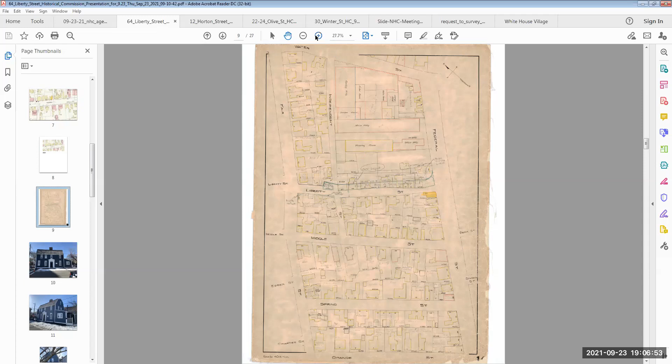One thing I'd like to point out - if you could go to the slide right above the first photo, Caitlin. It's very small on our screens, I'm not sure what's coming through on your screen - is it possible to blow up a little bit? She can zoom in on a portion if you want.

What's important is the main historic structure has existed at least since the mid 1700s. There was a later addition on the back, adjacent to Liberty Street, which shows up on the Sanborn maps back to 1888. Sometime between 1988 and 1995, a porch was later enclosed with an addition according to building permits, on the inside of that addition adjacent to the abutting property on Federal Street - part of the current shedded roof addition on the rear.

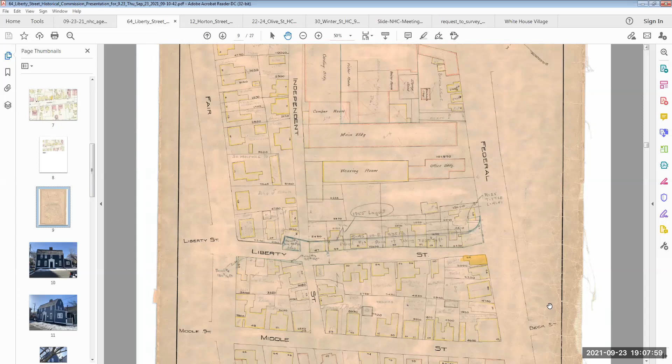On the other side, which I'll show you in a minute, there was a later added addition which the neighbors directly on the rear have said was originally a covered porch. There's evidence in the building permit files that in 1995 a permit was issued to enclose that or put on an addition - so there was a more recently added addition on the inside of this addition on the right-hand side of the structure.

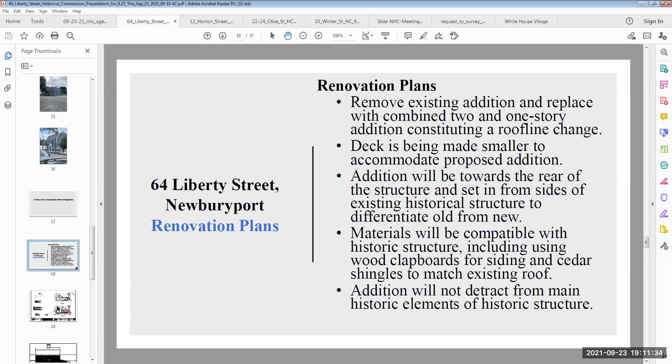You can see the proposed new addition is slightly larger, going out to the west a bit in footprint from the existing addition. Both step back from the original structure. Importantly, the original structure actually goes over the property line to the south toward the Tushes, so we are respecting the property line, which brings it inside the existing historic structure.

Similarly, along Liberty Street, it will be stepped in slightly from the existing structure. We did have a question earlier in the week from the staff — there's a tree shown in the middle of the deck. That will remain; the deck will be built around the tree.

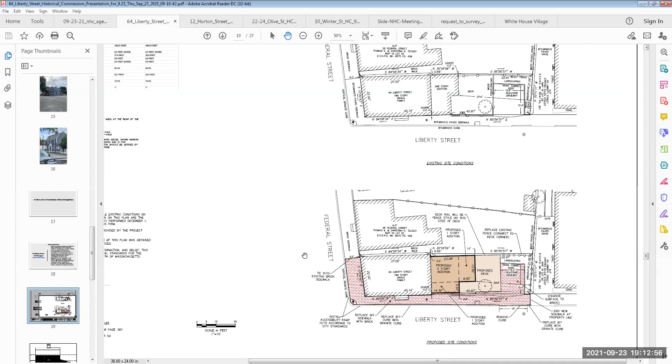So at this time, I'd like to turn it over to Julie to talk about the existing elevations and the proposed elevations.

Hi, this is Julie McDonald from Olson Lewis Architects, representing Eve Lee, our client. We wanted to go through the slides, starting with the existing conditions. So we're looking at the north, Liberty Street.

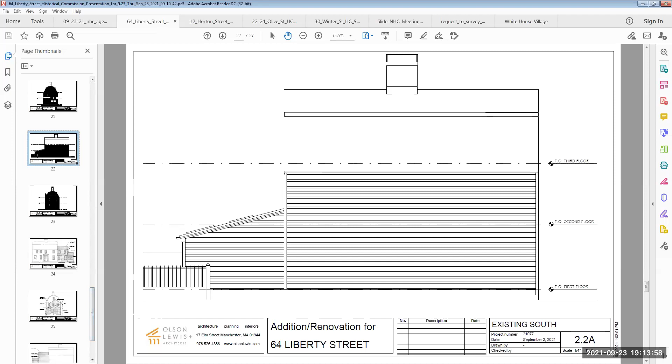This is facing the back, the south, very close to the property line. As Attorney Mead said, on the far left side we are actually over the property line at that rear corner. You could move forward to the next slide.

Excuse me, this is Joe Morgan. I have a comment or question. The reference to the direction of the elevation — this is a different standard than I'm used to. You're saying this is looking toward the east, but I would call that a western elevation. Is that not true, or maybe I'm just disoriented?

This is Mr. Morgan — this is the east side of the structure, it faces Federal Street, the east side. So Joe, if you went up to this particular side and turned around to face away from the building, you'd be looking eastward. Okay, I'm sorry, I guess I'm just disoriented.

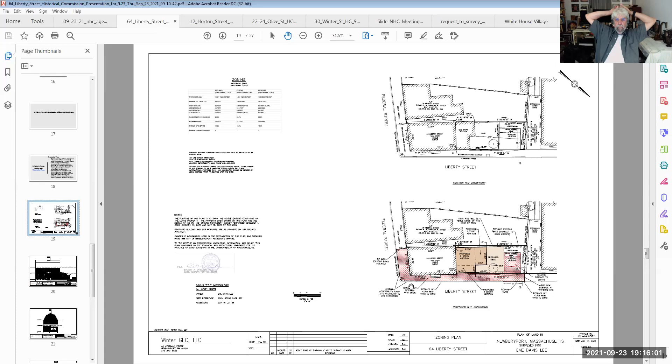Is this on the northern side of Liberty Street? No, the southern side. If we could, just to orient — sorry, go ahead. Let's go to the site plan. This is the corner of Liberty and Federal. If you were standing at the bottom of this plan looking at the structure, your back would be to the tannery. Okay, so I'm looking at the north arrow up there in the upper right — so north is down on this sheet, right? Yes, that's correct. Okay, sorry about that, Joe. Thank you.

If you could go back to that elevation and let Julie pick up on the Federal Street elevation, please, Caitlin. Thank you — that's slide 23.

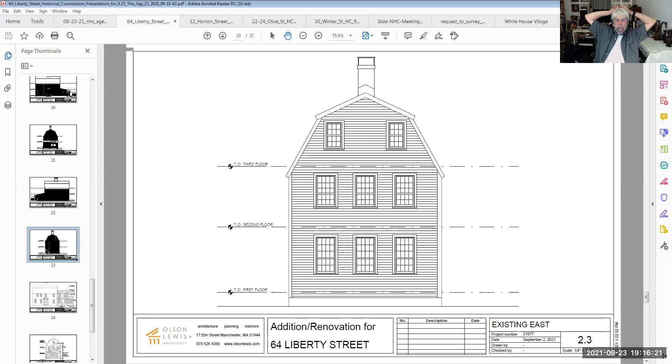And it is confusing because it's not straight east — it's not due east. Nothing is, in this town. Yeah, but it feels like it.

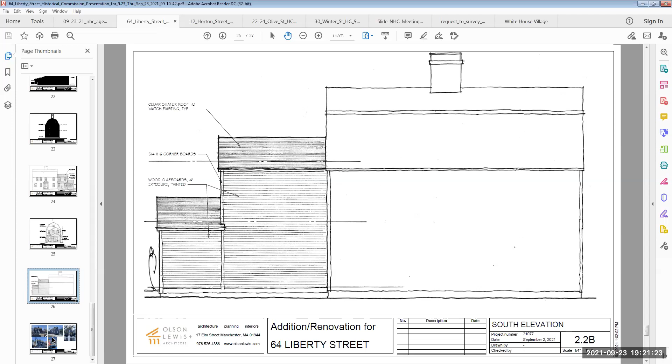And then I think the final slide is just more images, which Attorney Mead has already covered.

Yeah, and then one other thing—we did provide the board, the commission, with letters of support from the Tushes, who are the most immediate adjacent abutters on Federal Street, and the Stouts on 60 Liberty Street, which is the other adjacent parcel on Liberty Street, supporting the project.

So with that, we'd be open to questions from the commission.

Thank you, Attorney Mead. So what will happen next is before we go to public comment, which we'll do in a moment, I'll just check in with the other commissioners to see if someone has something they'd like to clarify or a question about what has been presented so far. I see a hand by Patricia Pecknick.

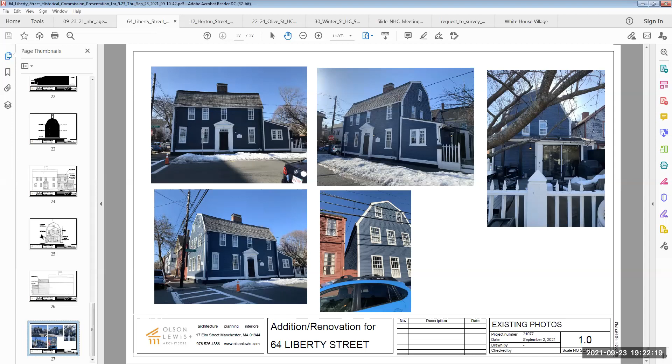Hi, I'm just wondering, what is the ridge height of the existing addition now, and what is the ridge height of the two-story part of the proposed addition?

So we have that on one of the plans. You said the eaves will align, but I'm curious about the ridge height. Yes, so if you go to the proposed—go down one more, see if we have it on that one. The ridge height, I've got it here, Lisa. Sorry to interrupt—we see it on the west elevation.

It's noted that the ridge height of the new is approximately 22 feet 4 inches. Give me a minute, I will get it—I'm able to measure where I am. To the top of the roof of that addition, we're about 12 feet 8 inches.

What's the ridge height of the original? Of the main house? Sorry, misunderstood—it's almost 29 feet, approximately 28 feet 10 inches.

Okay, and then the existing addition that's there now, that's going to be demoed, I guess. Oh yeah, I thought that. That's what I was mentioning originally.

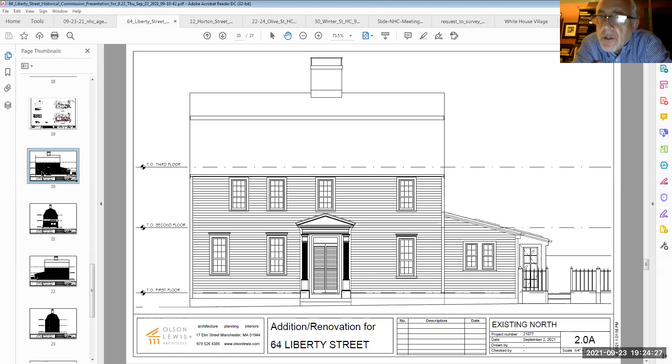Well, a couple of things - we didn't think we should necessarily exactly copy what we have at the main house. We'd certainly be open to it if that was something the commission felt strongly about. But the existing windows are fairly narrow, so we thought it was a good opportunity to deviate a little bit and get a little bit better windows for the new part.

They're, let me look to see what they are. Give me a second, I'm juggling drawings. Yeah, they're just a little over 2 foot wide. The existing, at the second floor, about 25 inches. First floor, yeah, that sounds like late... 17th century.

It should be 18th century. Yeah, again, it felt like we certainly looked at that early in the design process, and they felt small for the addition. But they certainly would be in keeping with the rest of the house.

And it may be something you want us to look at for that north Liberty Street elevation. This is Glenn speaking - would you say that even though this is a sketch rather than strictly a CAD drawing, these proportions are pretty accurate as far as the widths and all the dimensions and proportions of the existing windows and the ones in the addition?

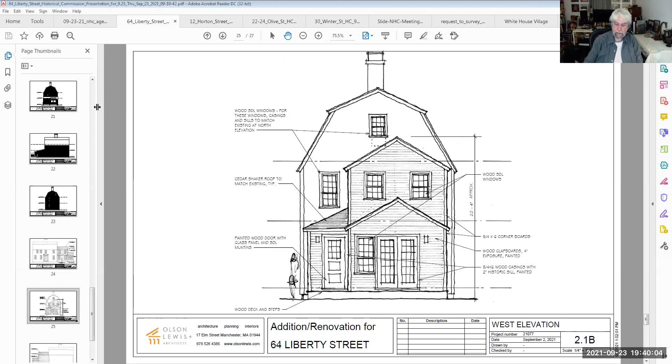Sure, Mr. Chair, this is Lisa Mead. A couple of things - I think we certainly will bring back, we will ask for a continuance, but I want to address some of the items the commission talked about. We will come back with a more specific description of the windows as requested, also the exact dimension, which is 22.4. We'll give you a line drawing instead of the sketch so there's no question about that.

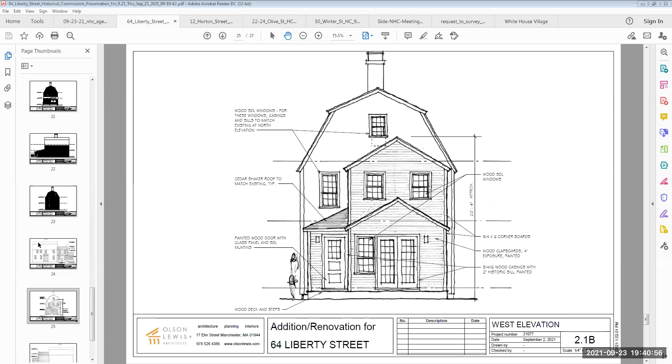I would just point out to the board, relative to the interior work - which we don't need to go down that path - it already has an addition on the first floor, so the first floor already has openings, as the commission knows. But we will be more specific about where the openings are on the second floor. As you well know, Olson Lewis Architects are a very reputable architectural firm, not unfamiliar with working on historic homes across the North Shore.

And so you should have great confidence that they will be doing the right thing there. So we can give that back to you. I guess I wonder if you would like to see the smaller windows on an elevation as compared, just to give you an idea of size. The new proposed windows are 30 inches, and as you heard, the existing are about 24. So that's the difference in sizes. But if you would like to see how that looks, we will bring that back to you as well.

Thank you, Attorney Mead. A quick question on this north elevation we're looking at right now. The second story windows look a little smaller, but is that just because they're further away, or are they actually the same size as the first floor? Can you answer that question about the size of the two separate windows, first and second floor? Yes, actually at the second floor we are a little narrower. Those are 2'4" versus the 2'6" at the first floor level.

Okay, which is a little bit of differentiation floor to floor. Yeah, that might, okay. If you're willing, that would be great, Attorney Mead, if I understand you correctly, to get the final and cleaned up drawings. And if you're willing to take that step of letting us be able to see, so we can get a consensus vote on which we think is more historically accurate or appropriate, or which better conforms to the standards.

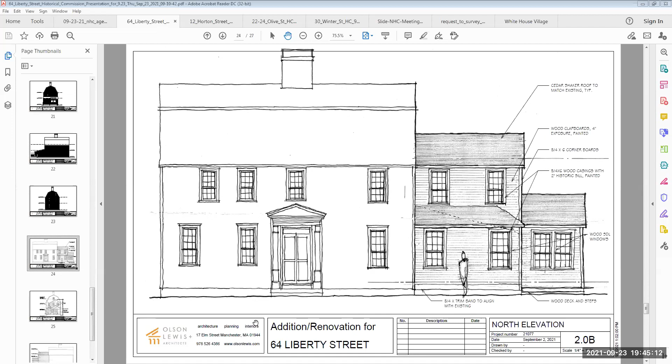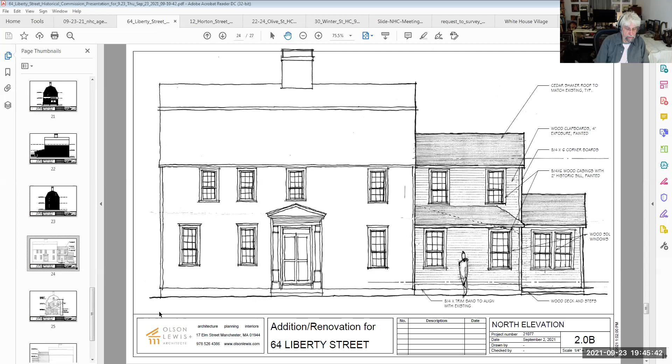Thank you for your flexibility and cooperation, Attorney Mead and applicant, if you're there. We'll see you in a couple of weeks, and hopefully we can get this resolved. I think from what I'm hearing, the chances are good, and we'll take it from there. Thank you very much. And thank you, Ms. McDonald. Appreciate your coming in. And I know Attorney Mead, I'm sure you won't be going anywhere.

I believe you'll be hearing from you on a couple other matters, such as the next one I'm moving on to, which is 12 Horton Street. This is a similar situation. We have a newer house, late 19th century, but it's listed as contributory. Doesn't have a Form B, but it is listed. And again, with this one, it's a similar situation as with the first matter.

Attorney Mead has suggested that she expects the commission will find that it's historically significant and should be preferably preserved, whether or not we agree to the formal plans. So the same question, Attorney Mead, would you be averse or adverse to us moving swiftly to the vote

on the motion as to it being historically significant and considered for preservation? I don't, Mr. Chair. Lisa Mead, Talerman and Costa, on behalf of Lisa Adams and David Miller, who are the owners of the property. I certainly don't. And the record shows all of the history. Mary Eaton was kind enough to provide some additional color around this section of the city, and my hope is that folks take a look at it, because it's certainly interesting to learn how Horton Street and the area generally was laid out. Yes, I did see some of that, and that was interesting. So thank you for providing that history.

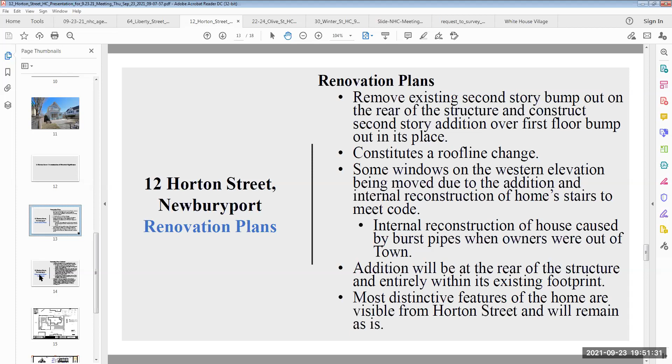Kevin will talk about that a little bit. So the easterly side is stepped back significantly away from the most easterly wall of the structure, which we'll show in a minute too. If you could go to the site plan, Caitlin, please. So here is the site plan. That's not changing at all. Everything's going to be done within these lines.

And with that, I'm going to have you go to the next slide, which will be the beginning of the elevations. Kevin? Good evening, this is Kevin Latady. Actually, the last name is pronounced Latati. Sorry, Kevin. That's all right. It's not a common name, so most people get it wrong. And that's how I know if you don't know me.

So the elevations, the existing north elevation is the Horton Street elevation. There are no changes to that. The significant elevation that you do see from Horton Street is along the existing east elevation.

What you're seeing in the pink, or the reddish tone, is the second floor bump out back bedroom. That's going to be enlarged to encompass the whole width of the back of the house. You'll see that in the updated elevations on the next slide.

There is a chimney in the lower roof area that's coming out. That was an added fireplace that I believe was done at one of the kitchen renovations.

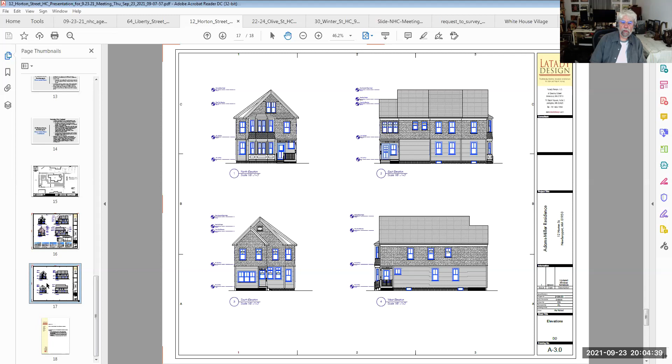Thank you. Let me just—Caitlin, could you go back one slide to 17? I just had one real quick question, I think I got this. Looking at the upper right, the east elevation, where the roof notches down there, am I correct to say that higher ridge line is all existing structure, and the part you're building out or modifying is strictly that lower roof line there?

If you go back to slide 16, it'll be a better picture for you. Okay, now I see. That's why I do that on the demo plans, because it makes it easier for us to see how that works. So you're extending that original a bit, kind of trying to make it look original by continuing the flare and all that good stuff.

It's kind of awkward the way the house has that kitchen with a lower roof there, and it doesn't extend back. It almost felt like this is what they wanted to do, but hadn't gotten around to it yet. I specialize in older and historic homes, and it really is about the storytelling - you start with one room, then they just keep going from there. It almost had that feeling like they just hadn't got to it yet.

Okay, well, let me turn to my fellow panelists here. Does anyone have, before we do the public comment period, any question or clarification on anything before we go to public comment? Looks like people are not hearing or seeing any comment.

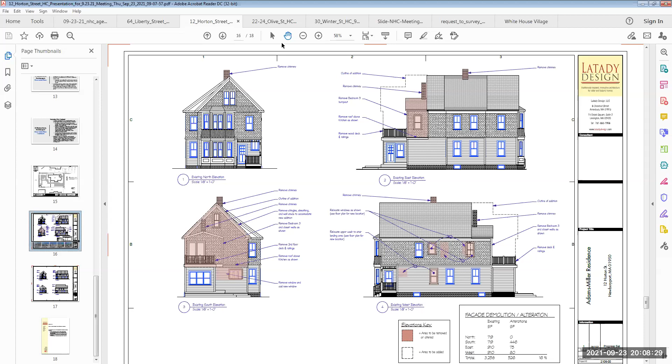Late 1890s. And is this all dimensional lumber in the existing structure? It is a balloon frame, sawn lumber. The foundation is rubble with brick laid on top, and the sill is an 8x8 beam with balloon frame above. Does that answer the question, hopefully? Yes, thank you, it was just for information.

I have no other comments. Thank you, Joe. Okay, who else? Mark Cindrone, your thoughts? Thank you, just a quick practical question.

If you're going to take that chimney down, where is your boiler chimney going to be? It's direct vent. I'm sorry, I missed that, could you repeat that? It will be direct vented, and it will probably go to the east, the west side, direct venting.

I think the flood was due to a heating system failure, so I assume that's a new heating system you're putting in. Actually, the flood was a pipe going to the second floor bathroom, and since it was the second floor, it flooded the first floor walls, ceilings, and then the basement became a swimming pool. So the boiler, everything was pretty much toasted down there. All right, our sympathies with the applicant, but anyway, moving on.

Let's see, Vice Chair Pecknick, any thoughts or comments? No, I support this. I was going to support it when I did the site visit and looked at the plans and walked around the street, but then they had me at Window Woman of New England. I'm sorry, what did they have you at?

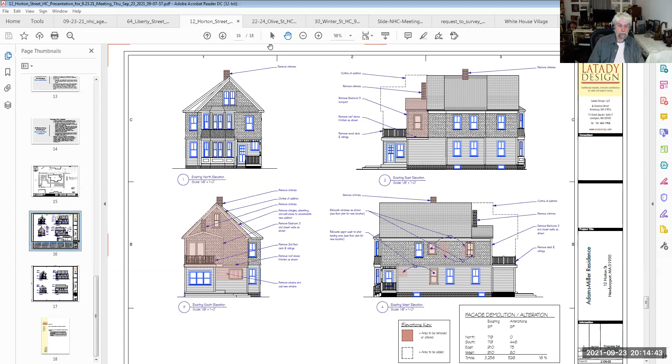So this means, if the applicant is listening, I'm sure you're smiling. The demo delay was only imposed for probably less than a minute, and we look forward to you successfully executing your plans. Thank you, Mr. Latady, for your presentation and design, and good luck with getting this done and moving back into your house. Great, thank you. Thank you very much, okay.

I believe, Ms. Mead, you're still with us, right, for Olive Street? I am. Okay, all right, so we move to the next item on the agenda. This is 22 Olive Street, and I will turn it over to you, Ms. Mead, to introduce the updates to your plan. But let me first explain, for the board and mostly for any members of the public, what we're about with this phase.

The Historical Commission has already found this structure to be historically significant and preferably preserved, as with the previous two, and a demolition delay was imposed. Now, the demolition ordinance states that this delay is enforced for one year unless, quoting here, the NHC has been satisfied that the applicant has made a bona fide, reasonable, and unsuccessful effort to locate a person willing to purchase or lease and preserve, rehabilitate, or restore the preferably preserved building or structure, or B, the applicant has agreed to accept a demolition permit upon specified conditions approved by the commission. Such conditions may include review and approval by the commission of a revised set of the submitted site plans according to the requirements of section C1F.

So this is where we are now. Attorney Mead, I believe, is going to present some revised plans that they've been working on since this was put under the demo delay, about a bit over a month ago. So with that, I'll turn it over to Attorney Mead to present the revised plans.

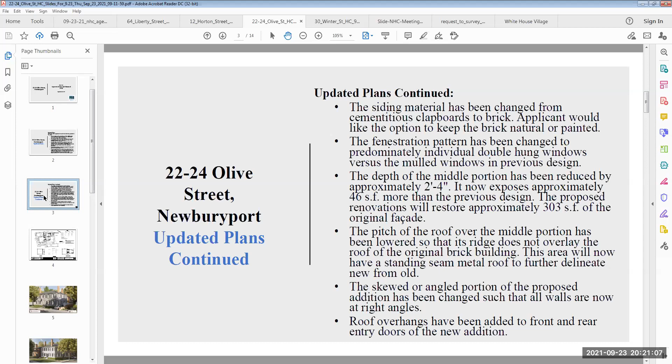So with that, what I'd like to do is go to the next slide, which is the site plan, because I think it's really important. So as I said, a couple of things: you can see by the mass of the addition, which is crosshatched, the existing addition goes all the way to almost the sides of the historic structure.

So obviously that is going to be taken off. The new addition, you will see, is actually not even as wide as the historic structure. In fact, significantly less on the rear side, the north side, right there. It's more narrow, if you will, with a step back from the side yard than the original structure.

Also, as I mentioned, given the removal of that broader addition that exists today, as well as the existing garage, the lot coverage is much less, and the open space on the lot is more than under existing conditions. And so with that, I'm going to turn it over to Ernie.

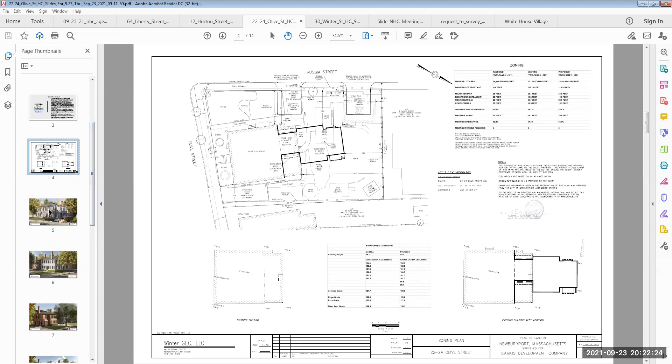Thank you, Lisa. Ernest Mayo from Tektoniks Architects. I think Lisa covered the particulars very well, so I'm going to move into the images specifically so you can see the project.

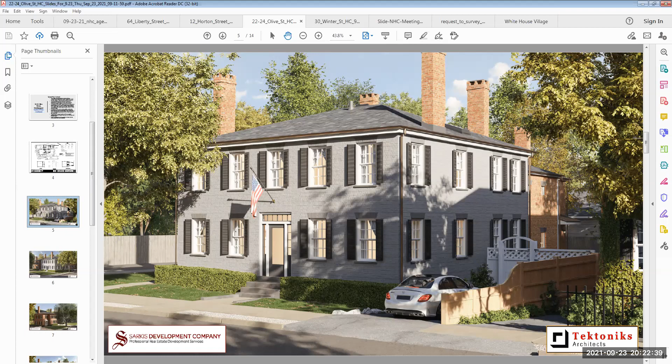This three-dimensional view is from Olive Street. You can see the original building in the foreground and the addition peeking out through the backside. The red brick portion of the building that's protruding is the addition, with an additional chimney added to tie into the existing building.

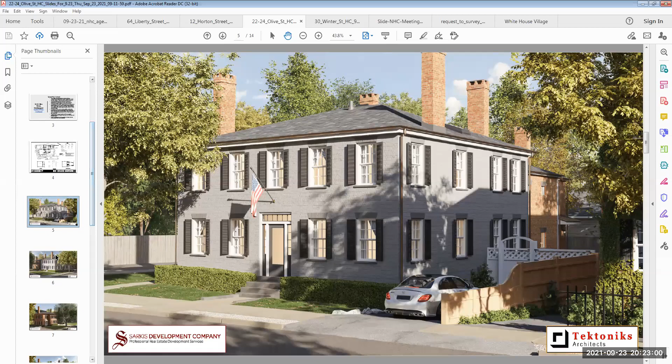This is a view from the corner of Olive and Russia Street. As Lisa mentioned, the addition has been straightened, if you will, so that the planes of the Russia Street facades are all now in keeping with the plane of the original building.

However, the main body of the addition has been set back slightly further than it was in the last presentation. We have also set the connector middle portion back even further from the addition facade than in our last iteration, so that there is a significant void between the main mass of the addition and the existing building.

We've also articulated the main mass of the addition, the far end of it, by setting it back further. These are techniques we're using to try to reduce the apparent mass of the building when viewed from the street. Each of these changes in setback is serving to make the mass not only smaller, but appear visually smaller, which was a concern in the last meeting.

This view is from Russia Street looking towards the building and towards Olive Street. Our next slide will show it with the tree removed, but we wanted to show it with the tree in place, which we're keeping.

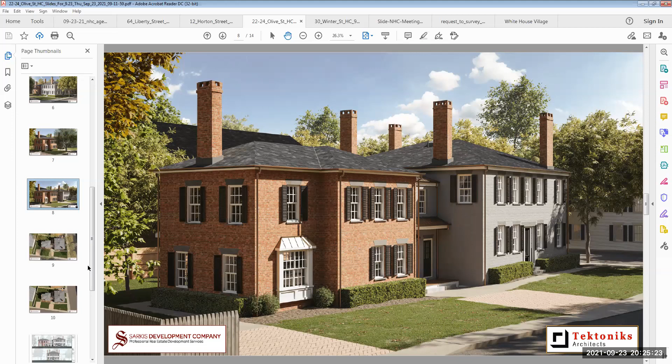The connector between the red brick portion of the building and the original building—actually the roof line dies underneath the eave of the existing roof. We no longer overlay the original historic roof, which we think accentuates and celebrates the original building even further than we had done previously.

We have added metal roofs to the roof overhangs and the connector roof, and also the bay shown here in the foreground, as a way of distinguishing the materials from the original building and also allowing us to drop the slopes of the roofs far enough so that we can tuck down lower and reduce the apparent mass further.

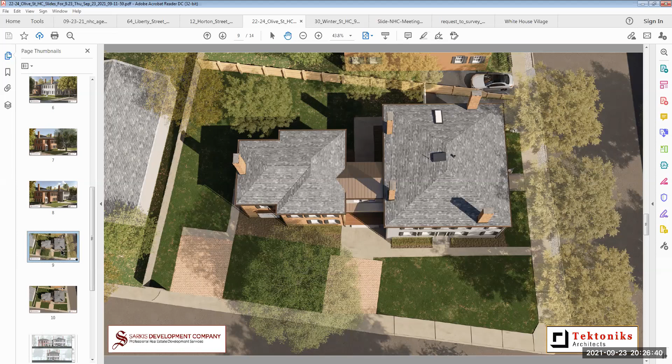The setbacks off Russia Street have been increased. The setbacks off the side and rear yards have been increased. This next slide shows the trees removed so one can get a sense for just how large the lot is and how much open space exists around all of the buildings.

In fact, when compared to neighboring sites, the addition we're proposing, virtually centered on the lot, is further away from its lot lines than a large majority of the buildings in the neighborhood. I think that's a very important point.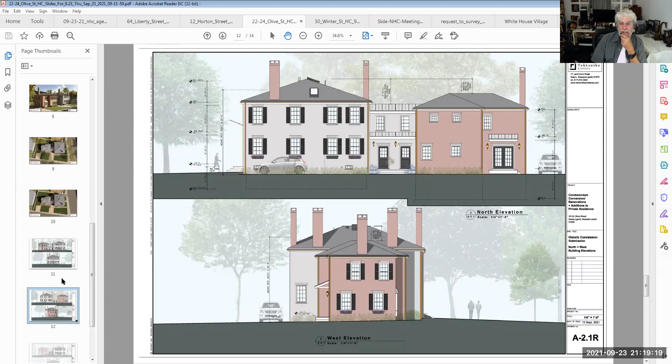It's not quite a bay window, I'm not sure how to refer to it, that white window on the Russia Street facade. You can see it on slide 11. Thank you, Caitlin. It kind of draws a lot of attention to itself, and perhaps from the architect's point of view, you wanted to add a little more interest there. But I think it's a subject of debate as to whether it's a little bit too much attention.

My feeling is not so much that it's more, it seems almost like it's a different stylistic period than the rest of the fenestration, because you've got windows on that addition that are consistent with a more or less period style. Looks like they're 6/6, which was a slightly later period, consistent with, I forget the age of this house, but certainly consistent with what appears to be a general federal period or thereabouts, turn of that century appearance. But then you've got that window that almost looks like it's from a much later period, like something in the second half of the 19th century. So that, to me, is a bit jarring.

Other than that, I think some of the concerns of the abutters, I wouldn't say they're invalid, they certainly have merit. I think some of them are the purview of the zoning board, in terms of parking constraints and so on. If Caitlin, you go to slide 10, I think you can see from that rendering there's quite a bit of open space still there, considering Newburyport lots, not only on the Olive Street neighborhood but all along that neighborhood.

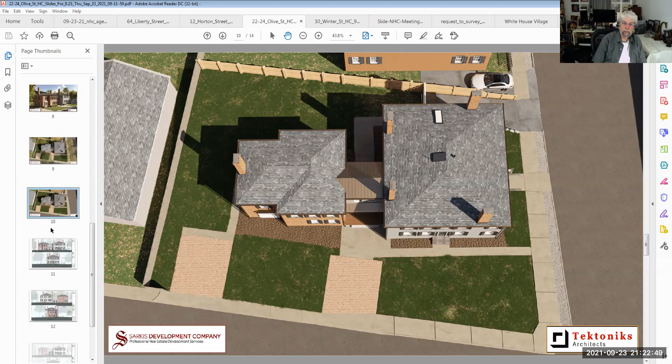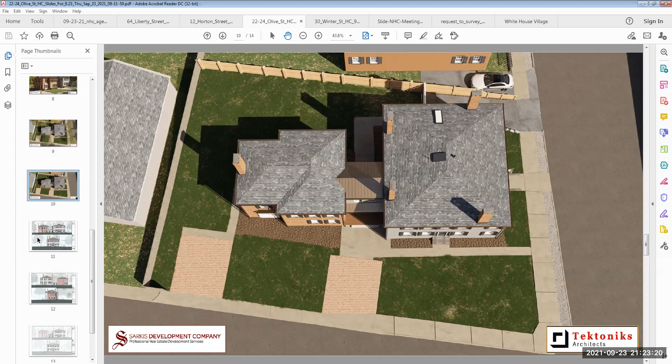Thank you, Mr. Chair. I think that's probably a good idea. So what I have is the windows on the north elevation related to the chimney, and take a look at the ones on the inside west elevation as well. Actually, it's the west elevation that's in relation to the chimney, and then the north elevation, which is the side yard. And then re-examine the bay window, perhaps. So that's what we will go do and finalize it, so the commission has a final plan that they can act upon.

And so we would request a continuance to the October 14th meeting. And if I missed anything, you could let me know, but I think those are the main items. Okay, thank you, Attorney Mead.

Is there a motion to continue this matter? Well, actually it's not really a continuation, but we'll do that anyway just to make it official. I think technically it's not like an open hearing or something like that. But we'll go ahead and suggest a motion to continue this to the October 14th meeting. Is there such a motion?

So moved. Okay, that was Malcolm. Thank you. Is there a second? Mark Sento, I second. Okay, thank you, Mark. We have MC and then MC.

And before they leave altogether, in addition to the things that Attorney Mead called out, does anyone think there's anything you'd like to recommend they reconsider as they're finalizing their plans that was not already mentioned? And I'm not hearing anything. Okay, good.

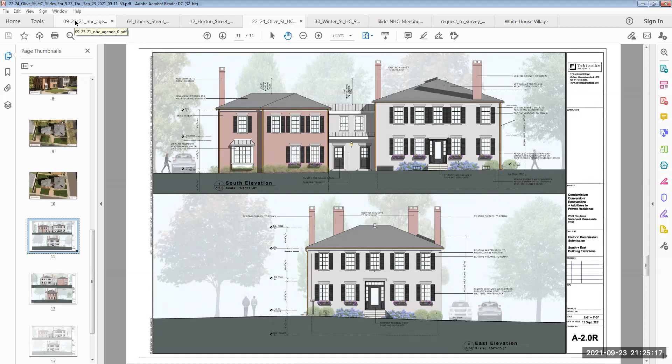Okay, so we'll move on to the last major item here, which is 30 Winter Street. This is a very similar situation as the one we were just doing on Olive Street, where it's under a demo delay, and the applicant, Mr. Primack, came back earlier, but there were some deficiencies in the plans. I believe he has newer plans to present, which we've had a chance to take a look at.

So first off, I'll invite Mr. Primack if he's here. Let's see, is he here? Yes, he is here. And we've enabled your audio, Mr. Primack. Am I pronouncing that correctly? Primack. Primack. Okay, thank you, Mr. Primack. Anything you'd like to say about your updated plans in particular? Seems like they're mostly a question of adding some things we asked for last time, but anything else you'd like to say? No, pretty much what you said.

You guys had asked me to come and show you some of the interior elevations as to why I wanted to increase the back as such, and then I think the last thing was a discussion about the windows, whether it was a possibility of preserving the windows, doing anything to the windows.

So I took quite a few pictures of the windows. I actually had somebody come into the house who is somewhat of a window specialist, and they told me that the windows were not actually original. They seem to think there was one window up in the third floor attic that might still be original, and that the other windows were actually reproductions, probably made in the 80s or 90s. They said the reproductive quality seemed to have been pretty good, but like the rest of the house, they were poorly maintained.

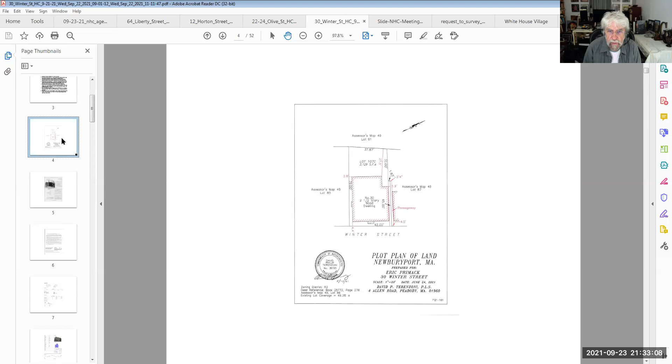So Caitlin, we can probably skip over, just a real quick look at the plot plan. Let's go back up to that first one. Yeah, okay, so the footprint isn't changing. Is that correct, Mr. Primack? Correct. Okay, all right, so then there's really nothing much to see there.

And then we've got the Form B and so on, which we've all been looking at, so we can jump down. What's on page 9, still like assessor's information, that sort of thing? Correct, still there, okay. And then what's page 10, Caitlin? I think that's just the zoning determination. Okay, and 11? 11 should be the existing front elevation. Yes it is, okay.

So not doing anything to the front, which again I think is the most important, not changing the street view, not changing the character of the neighborhood, anything. It's going to look exactly the same, better, keeping all the windows, keeping all the trim, keeping all the setbacks, everything that was there, the two chimneys at the top.

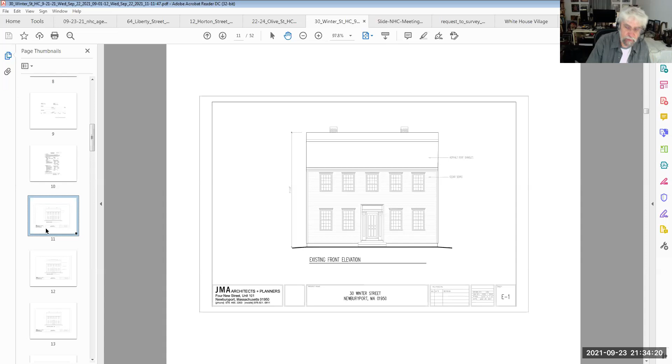So the window size will be exactly the same. You don't have to change the openings at all? Correct. So there'll be 12/8 on the second floor and 12/12 on the first floor. So it looked the same, except not dilapidated. Correct.

Slide 12, this is the proposed front elevation, which is essentially the same, only you've provided some information there which I think you've spoken to. I just want to move along fairly expeditiously here. 13 is the front demo plan, which is essentially none.

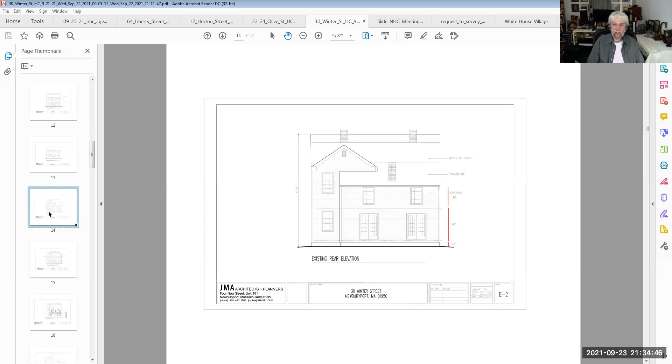Okay, 14, existing rear. Could you explain, you've given us measurements here with red lines and some dimensions. What exactly do those represent? So that represents the floor height inside. So the horizontal line is the interior floor? Correct. So your bottom is, there's 2 feet above grade from the bottom.

Then it's got 84 inches. This is in the back. So you've got 84 inches, which is just 7 feet, right? And then the back section is, I'm having a hard time seeing that.

I think that's proposed. The existing looks like 57 inches. I assume 57, that's correct, yeah, 57. So that's that, and for those of you who went into the house, those were the small rooms in the back. So from that back ridge, that's 57 inches. That's not even 5 feet tall. Yeah, at the back corner. So yeah, I understand that is one of the main reasons why we want to raise that up a little bit. Okay, so that's going across in the back.

As you slide down, you can go to the next one. Okay, so there's a proposed rear elevation. As I said, we're raising up the ridge, and as you can see, that little cutout section near the gable, we're only raising up that ridge about 2 feet. So that's all we're going. Now we're obviously changing the slope of the roof, so we're raising the whole thing, but I know there was some mention about not wanting to hide that gable so much. We really are only taking up 2 more feet off of that gable.

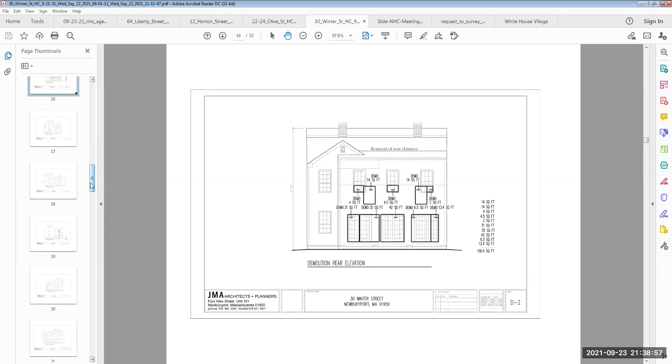Okay, phew. What's on slide 16? Okay, so that's the demo for the back, which was already presented. Right. Okay.

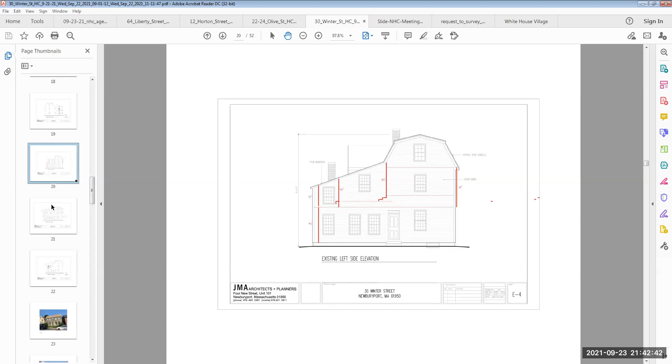So again, demo, shows demo on that side. And this is similar to the other one, but slightly different, showing the interior floors - this one's even funkier. It's got two steps down on that second floor, because there was that second floor bathroom on the left side. So it has a ridge, again 97 at the front, then it goes to 83, then it goes to 67, all the way down to 57.

So while we're on this, just to help me understand what you were saying before about the addition being up 2 feet higher where it meets the old house - so that red line with the 83 inches, that's the height there. Where that meets the gable roof at the top, is that where you're going up 2 feet for your new roof to start going out? Correct. Thank you.

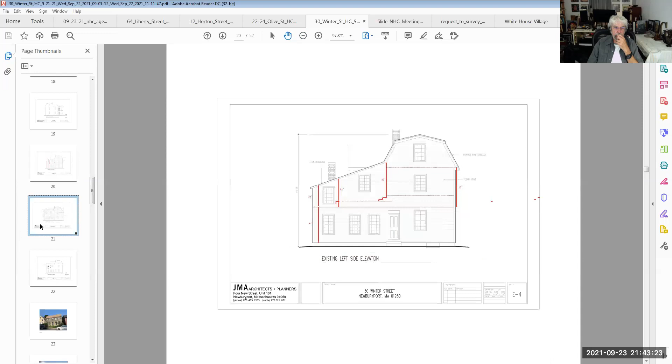Okay, next slide. Again, so the proposed left side is the same as the proposed right, with uniform heights throughout from front to back - 101 inches, which is what we already have at the front of the house, going all the way to the back kitchen, and 97 inches, which is at the front of the house, going all the way back to the second floor.

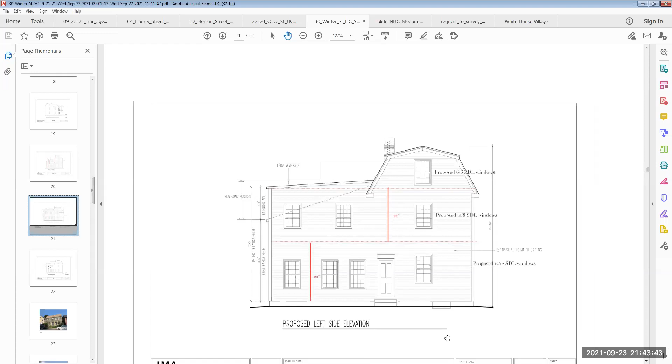And then we're not changing or doing anything up in the attic at all - we're keeping that gable roof. Again, the only thing we're taking out is that chimney in the back. Okay, next - and then the left side demo plan.

And then I got the photos, which we've pretty much seen - I added some more photos, which are the pictures of the windows mainly. So you can see there's one with the plastic grate, as you can see. You can slide through them easily, and there's some close-ups.

It appears somebody has swiped some of the trim on me too. Yeah, when we did the walkthrough, we noticed some of that interior trim was missing. As you can see, I took some close-up pictures, and you can see the sills are busted, rotten.

Interesting, missing panes. If they were reproductions, that might explain it. She thought they were only maybe 30, 40 years old, reproductions. Maybe not even that. These could have been from the 90s, could have been any era. She really couldn't tell because they were in such bad shape, but she said they're definitely not original windows.

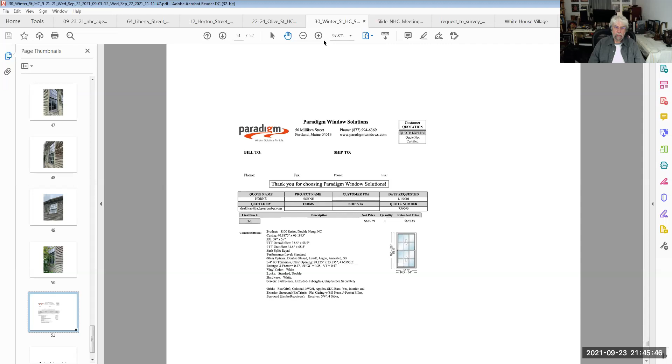I think the last thing they want to take a look at, if I think 51 is okay, is the window specs. So help us out here, are these basically solid vinyl or what? Yes.

Is there anything else, Caitlin? Any more slides to go on this? I think that's it. Thank you. So let me ask my colleagues if I've been asking the questions that have been going through. I'm pretty well set, but let me see if my colleagues have anything they'd like to clarify or questions they'd like to ask. Anybody?

Going once, going twice. Okay, well this is another one where there hasn't been much significant change to the original plan other than providing more details, so I'm not sure it's necessary to have another public comment period. We did have one earlier, so we did hear from a number of folks about this plan. Let me turn to my colleagues, let's see who's first up at this point.

Well, it looks like, Joe, the order still has you right next to me here. So, Mr. Morgan, any thoughts? I don't have anything else to say other than I could not support the proposed changes as long as the gable to the rear is not protected. I don't see any real change in the design relative to that. As far as I'm concerned, it's part of the original structure, a historically significant feature, and it should not be further obscured.

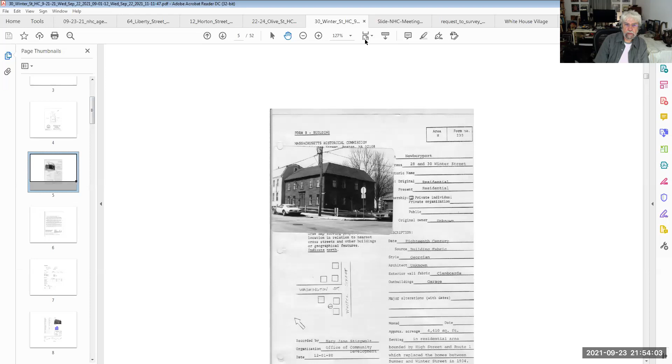Now, this house—you can barely see it. Could you blow it up a bit? Because this was done in the 80s, and I was hoping we could see what kind of windows were there. That house really has vinyl windows and aluminum frames, and you can walk by anytime to see. No, not the one in the corner—I'm not talking about that one. I'm talking about your house, and I assume, by the way, you've closed on it—I assume it's yours now. Yes. I'm looking at the house in the corner, but that's not what I'm looking at. Unfortunately, there's one Form B and one photo for both properties, which is too bad because you really can't see very much of your property.

I was hoping—geez, it almost looks like it has storm windows on it. I was hoping we'd be able to see what kind of windows were there, because that would be very useful. We might want to do a little digging, Patricia—maybe there are some photographs of Winter Street that would give us a clue. I had this thought that maybe they were all originally 6/6, since the one in the attic is 6/6, and it's quite possible that someone in their enthusiasm for things looking old put in those 12/12s and 12/9s and 8s. That's a possibility, but we shouldn't be guessing about something like that—we have to go with what's there, unless we have some kind of historical record or evidence to go on.

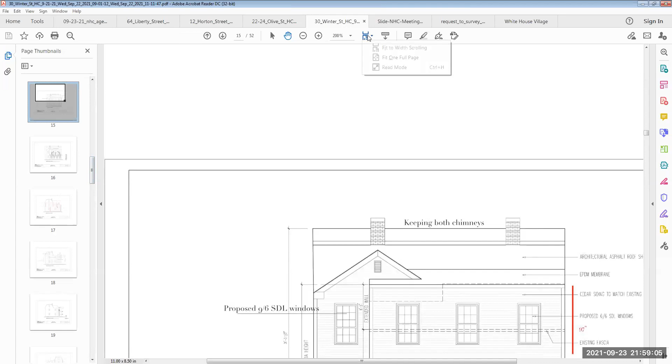In the proposed rear elevation slide, you can see the actual cutout of where we are increasing the section of closing off that gable. And it's literally about a 2 foot, it's probably maybe a 10 square foot section of how much we're going to be closing off that gable. The gable, the whole left side of it is still clear. You can still see it, that it was part of the original house. There literally is no detrimental impact to the features of this house.

I don't understand. And I don't have any problem with the structural engineer looking at it, but again, I've said that many times, you can't do it until you start some demo. You start some interior demo. Right.

What the concern is, I understand what you're saying, Mr. Premack, that oh, it's just a couple feet on that side. But what, like looking at what we're showing right now on the Zoom meeting, this is the proposed rear elevation. I mean, it's even more surprising based on earlier decisions that I heard this evening. That's what I don't understand either. In what way? Frustrating, because I've heard this over and over: if it's not detrimental impact to historic features, just because, no.

Well, I'd like to know what you're referring to, because I would love to hear from those who have no comment to give on this, or why they don't like it. I'm totally keeping this thing, restoring this thing to its beautiful original state. I'm lifting up the back ridge 2 feet. Essentially, that's all I'm doing. I'm taking a slope off the roof, lifting it up 2 feet, and making it so the back of the house is livable.

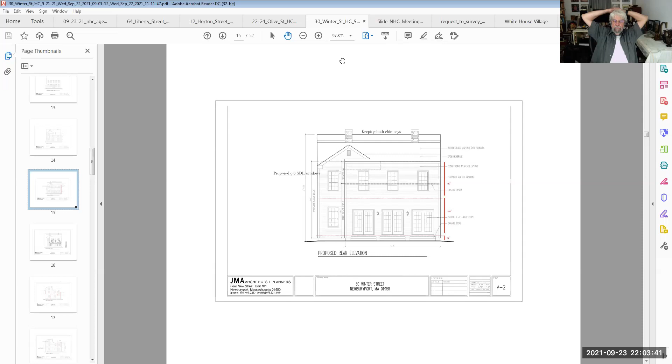The front of the house, we've already determined that back section is not original. There's no ways about it. And so I'm trying to extend the original and keep the heights for the original house. They're not 10-foot ceilings. 8-foot ceilings, I don't think is outrageous to ask for.

Okay, Glenn, if I may. Yeah, please go ahead, Peter.

I think the conversation around this gable has been pretty consistent throughout, and the discussion about the heights and what you're trying to accomplish, Mr. Premack, on that second level has been pretty consistent throughout. I understand that you're working very hard to accommodate wishes with regards to windows and be cooperative there and whatnot, but this has been a consistent conversation, and the comments on the gable have been pretty much the same since our first meeting.

You say that the gable is still there, it's well represented, you're not even touching the left-hand side, and that's true, but the right side of the gable is obliterated for all intents and purposes. It is buried. So I personally, and I can't speak for the other commissioners, but the fact that that gable is being so significantly changed hasn't been mitigated, and that continues to be an issue for the commission.

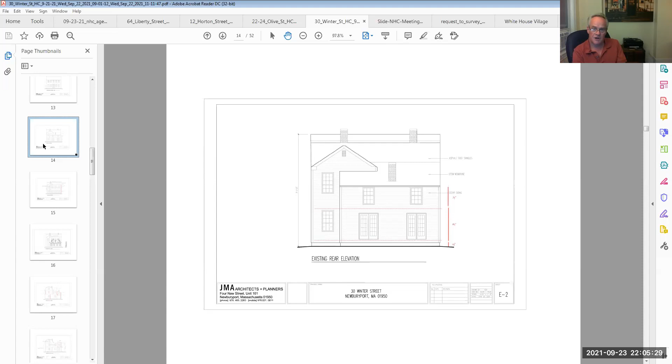So I understand your frustration, and I feel bad about it because I know what you're trying to accomplish with that head height. But Ms. Petnick's comments about the heights in those rooms—there's some inches to be gained there that I think you should take. And the more we look at this application with the gable still buried, the more you're going to hear the same comments.

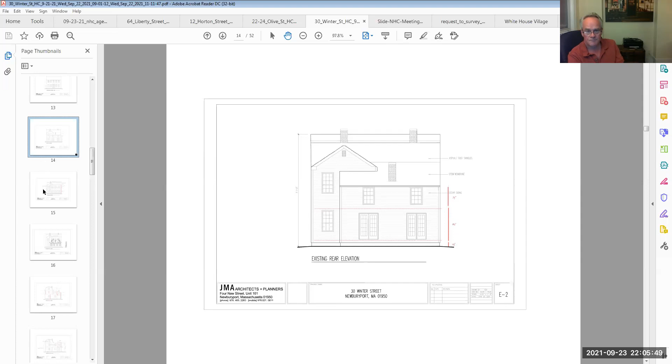Okay, can I ask you to look at slide 3 again? Oh sorry, not slide 3—the proposed rear elevation. Can I ask you to look at the proposed rear elevation? Yep, it's on display now. Okay, so you see the cutout section, the top left of the rear addition, the dotted line going across and up. Yes. Okay, so I would not use the term obliterated as any kind of a description for what I'm doing to that gable.

It's a 2-foot section that goes across 1.5 windows. That's literally 10 square feet. I don't know how you determined that that's an obliteration.

Now I'm also trying very hard because you asked me why. You said previously I only showed you the outside elevations, so I came back and showed you all of the elevations, inside and out, and how this thing was carved up at some point by whoever built this addition. They just put in a room off a roof, probably just framed another room off a roof, and that's why you have these different little rooms in the back. Certainly not anything to do with the original house, certainly has no historical bearing on this house whatsoever.

The historical bearing on this house is out front. Totally, I get it—you can see it from the rail trail. But I'm adding a 2-foot section onto that gable. How is that obliterating its view? That's what I'd like to ask.

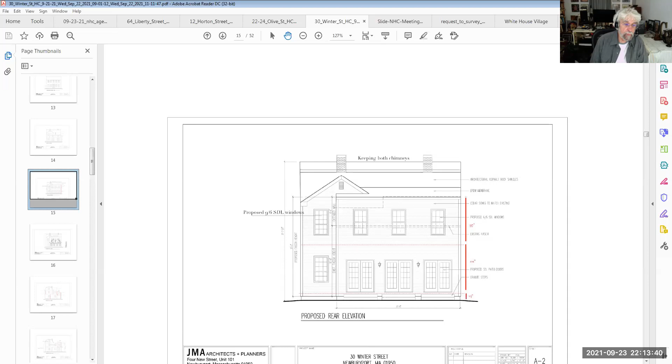You guys are obviously dying on your sword on this gable end. It's amazing to me. I could drop that gable down so you can see more of it. I mean, do you want to see all of it? Do you need to see all of it, or do you just want to see more of it?

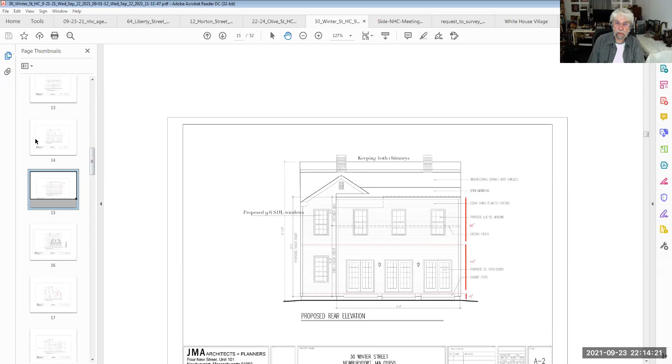What, you have a consensus on that? I think, correct me if I'm wrong, some folks like Peter or Joe suggested that the gable end is a significant feature that should be preserved from the ridge to its eave, just like it is on the left side. I defer to my colleagues on whether it'd be acceptable to have the top of the addition at roughly where the eave line is now, maybe a foot below. That would be acceptable to me personally.

Yeah, and so basically you're going to have to have a flat roof to achieve any kind of head height in there, because as you see, it starts before you're coming into there. Why don't you have your architect draw it up and show it to us?

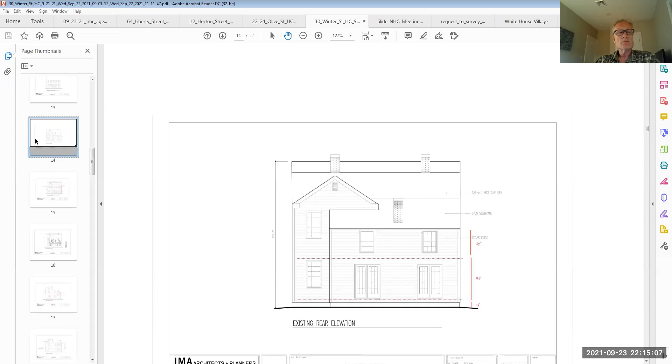Glenn, it looks like Patricia has her hand up. I'm sorry, go ahead, Patricia. Thank you, I'm trying to be sensitive to Mr. Premack's comment about getting feedback, but it's feedback that's not specific enough.

If I could go back quickly to the windows, I want to point out that on the Historical Commission's website there are the city's guidelines, and specific brands are pointed to: Boston Sash and Millwork, Green Mountain Window, which was used on the Garrison House rehabilitation, Stark, and Brosco, which we saw on a house with a PR on Merrimack Street. I just wanted to point out that when we mentioned wood windows, that information is in the guidelines. That's all I wanted to say.

Thank you, I get it. Guidelines, not requirements. Yep, I get it, I get it. I understand, I get it.

Well, to repair some 40 windows on that house—that's not what we're saying, Mr. Premack. We're not saying that. I think you're picking up a more adversarial tone than actually exists here. We're not fighting you on this.

There's a reason for these guidelines, and correct me if I'm wrong, Patricia, but I think all she and I and others are saying is that on the front facade, the windows should be wood windows that at least look like historic windows. On the other facades, here's an example where we're willing to be flexible and give you some flexibility as far as what you put in for windows, where they're not as obvious to the general public. So you'd be okay with wood windows in the front and vinyl on the side and the back?